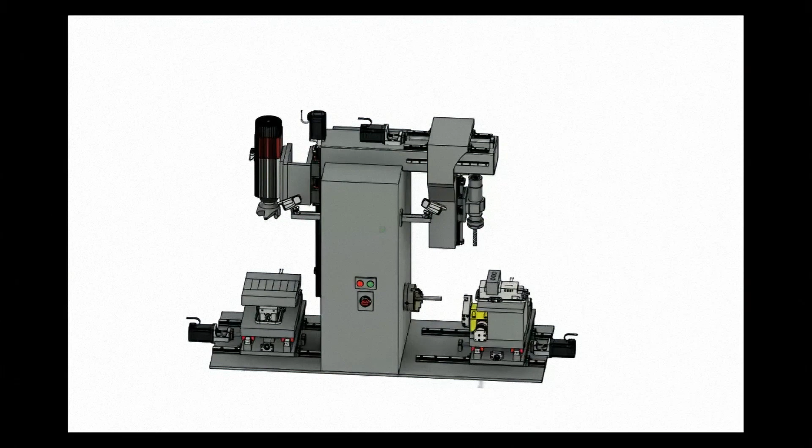In the modern world, almost everything is at our fingertips—computers, 3D printers—but one thing that is lacking is access to a machine shop whenever needed.

Our goal for this project is to design a portable, user-friendly CNC multipurpose machine, such as drill, lathe and milling machines, that could be used by any semi-skilled person.

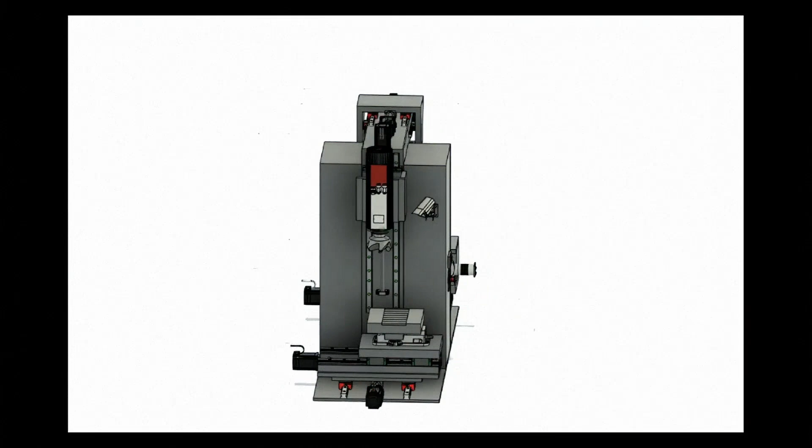Our project focuses on Internet of Things, IoT, working in conjunction with a CNC machine. Along with this machine, a software was designed by us in such a way that we can operate spindle speed, turning, and chuck rotation without having any prior knowledge of CNC programming, through the Internet of Things.

A lathe is capable of performing numerous machining operations to deliver parts with the desired features. Turning is a popular name for machining on a lathe. Nevertheless, turning is just one kind of lathe operation. The variation of tool ends and the kinematic relation between the tool and workpiece results in different operations on a lathe. The most common lathe operations are turning, facing, grooving, parting, threading, drilling, boring, knurling, and tapping.

Turning is the most common lathe machining operation. During the turning process, a cutting tool removes material from the outer diameter of a rotating workpiece. The main objective of turning is to reduce the workpiece diameter to the desired dimension.

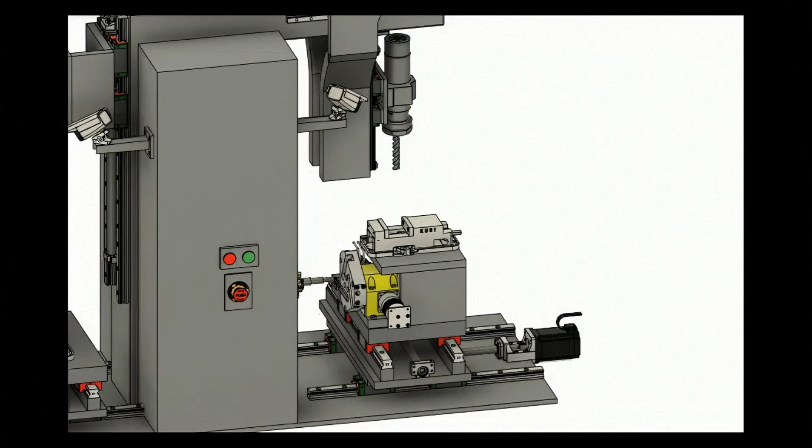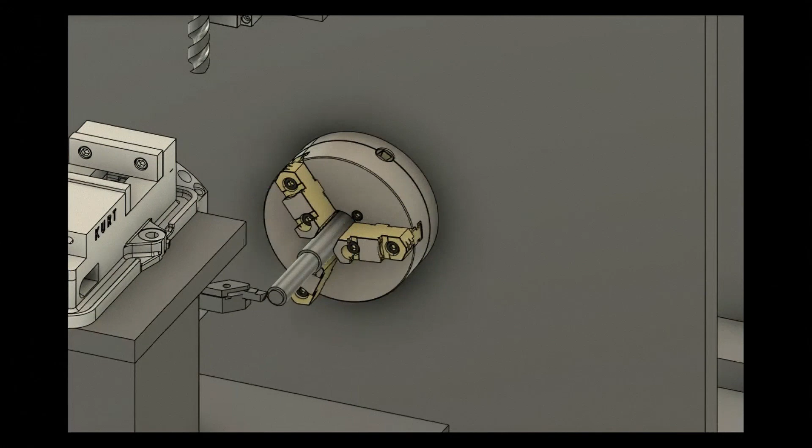Different sections of the turned parts may have different outer dimensions. The transition between surfaces with two different diameters can have several topological features, namely step, taper, chamfer, and contour. To produce these features, multiple passes of a small radial depth of cut may be necessary.

Step turning creates two surfaces with an abrupt change in diameters between them and produces a smooth finish on the metal. The final feature resembles a step.

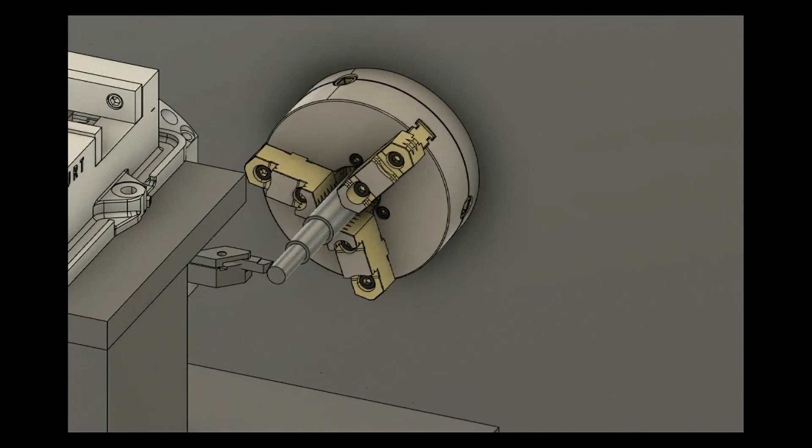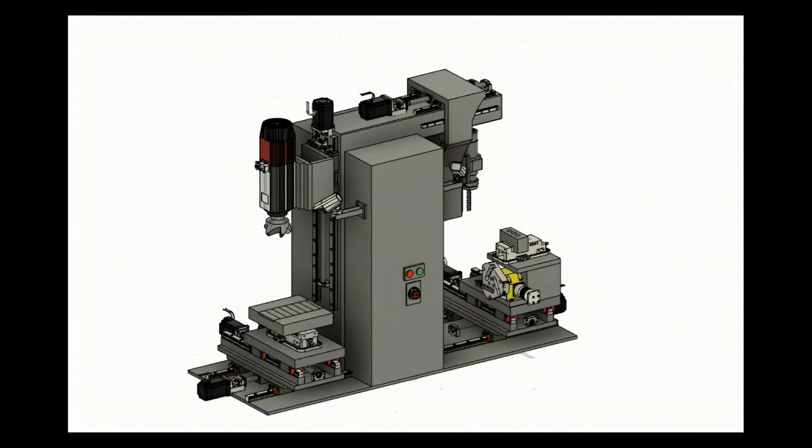Milling is one of the most common machining processes found in the metalworking and manufacturing industry. Milling itself is not just one procedure; rather there are numerous types of milling processes, each with different intricacies which make them more suitable for the needs of the finished part. The most common milling operations are slot milling, gang milling, up milling, form milling and face milling.

Milling is the process of machining flat, curved or irregular surfaces by feeding the workpiece against a rotating cutter containing a number of cutting edges.

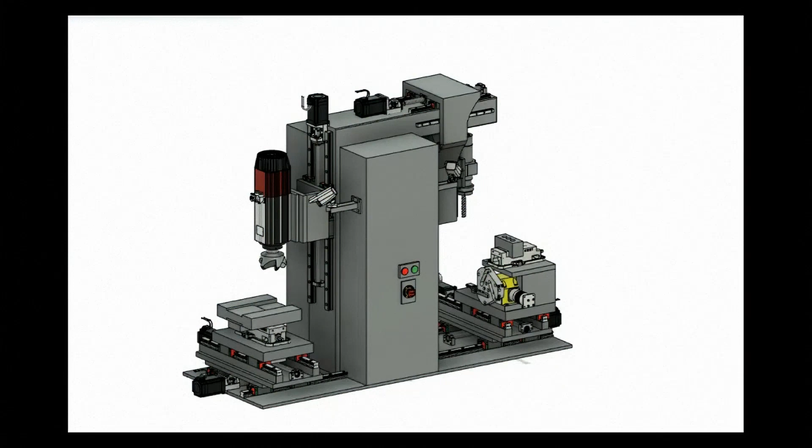The milling machine consists basically of a motor-driven spindle, which mounts and revolves the milling cutter, and a reciprocating adjustable work table, which mounts and feeds the workpiece.

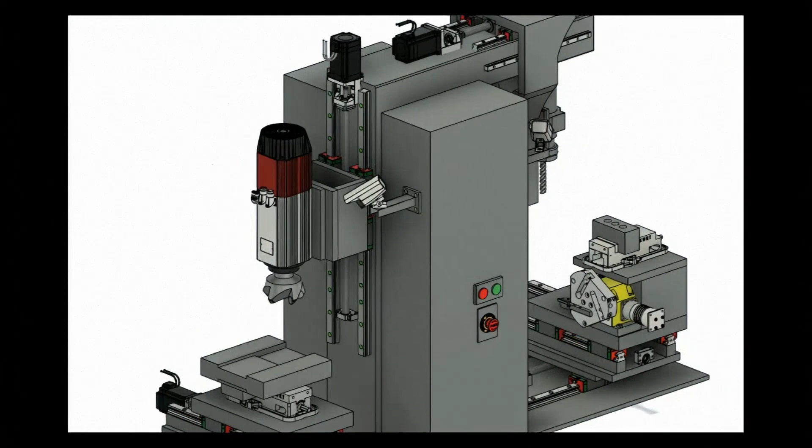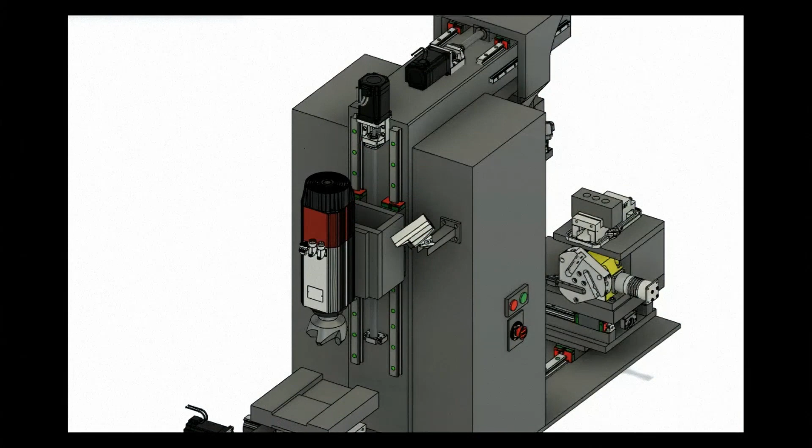In face milling, the size and nature of the workpiece determines the type and size of the cutter required. The cutting action occurs primarily at the end corners of the milling cutter. Face milling is used to cut flat surfaces into the workpiece or to cut flat bottom cavities. The teeth on the periphery of the cutter do most of the work, resulting in a better finish.

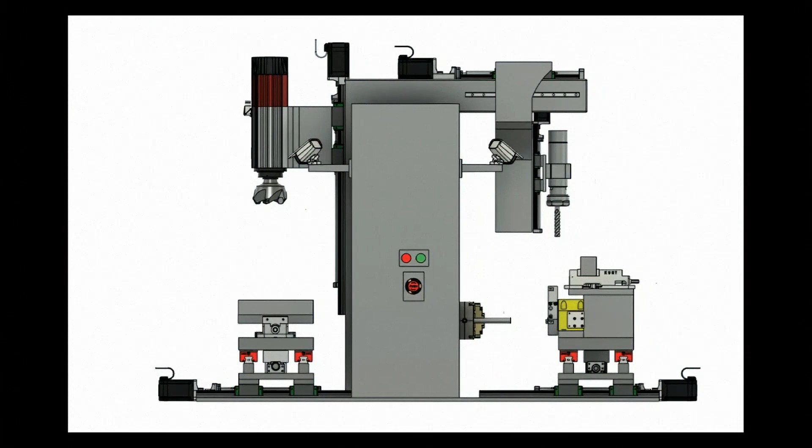The drilling machine is one of the important machine tools in the workshop. It is used to form a hole of different sizes in a job. Drilling is a metal removing process. By drilling machine you can do drilling operations, reaming operations and boring operations.

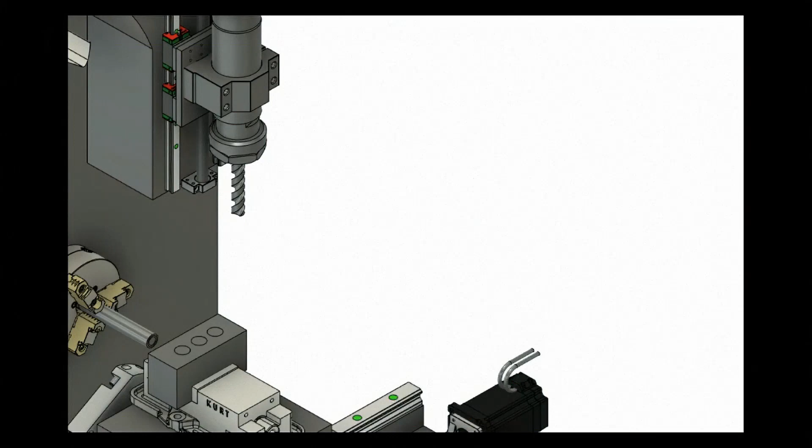Drilling is a material removing or cutting process in which the tool uses a drill bit to cut a hole of circular cross-section in solid materials. This is the most common machining process. One estimate is that 75% of all metal cutting material removed comes from the drilling operation.

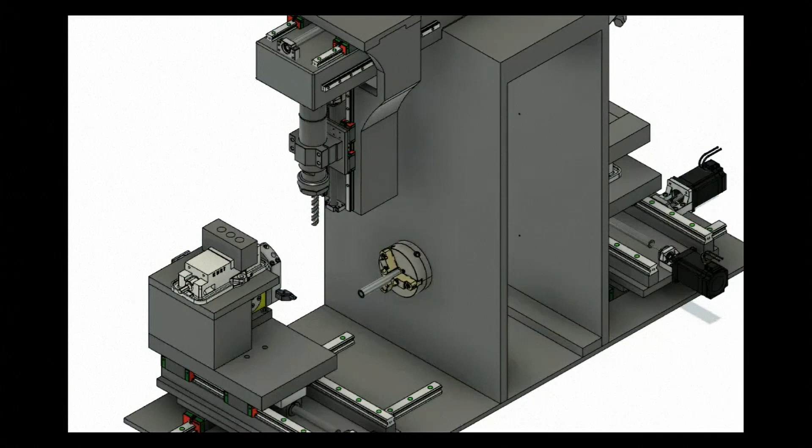Here, the material is removed by the rotating edge of the cutting tool. Drilling does not produce a fine hole. The internal surface of the hole is usually rough, and the hole is always bigger than the drill size.

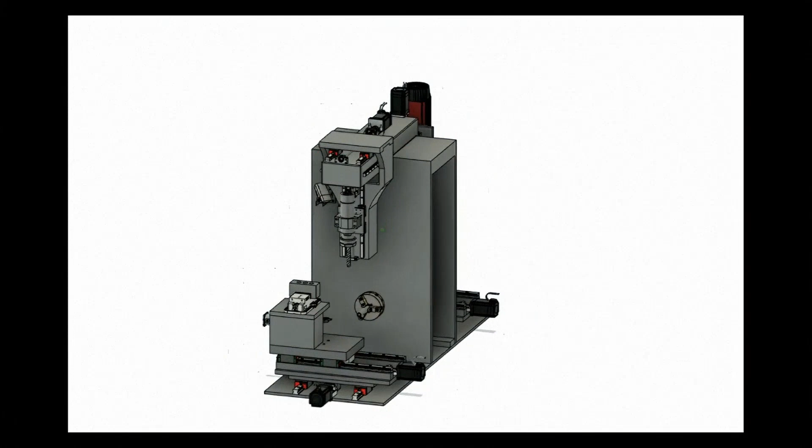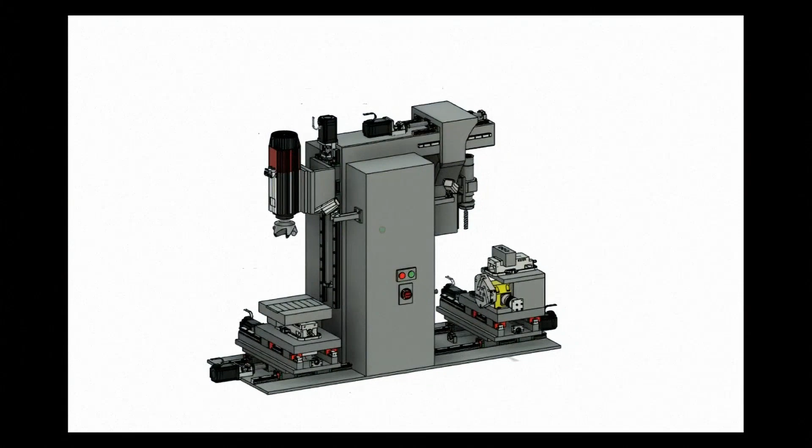If you think that the internet has changed your life, think again—the IoT is about to change it all over again. Today, manufacturing is changing faster than ever before, and the drivers for this include globalization, individualization, time to market, and sustainability.